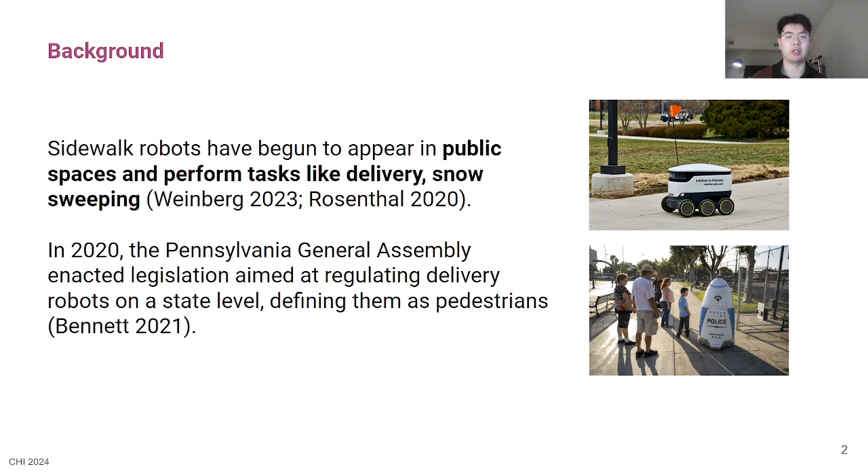Recent years have witnessed the emergence of sidewalk robots, which are essentially mobile robots operating on public sidewalks to perform human tasks, and some states in America have also regulated them as pedestrians. However, prior research has indicated that the presence of such robots potentially poses threats to other sidewalk users, including people with mobility disability. There was also a real-world accident that supports those judgments. We were very motivated to understand the relationship between the two stakeholders, especially to think whether we can design more accessible and responsible public sidewalk robots.

So to this end, human-robot interaction literature provided design factors and methods for us to discuss and test. In this paper, we asked three research questions.

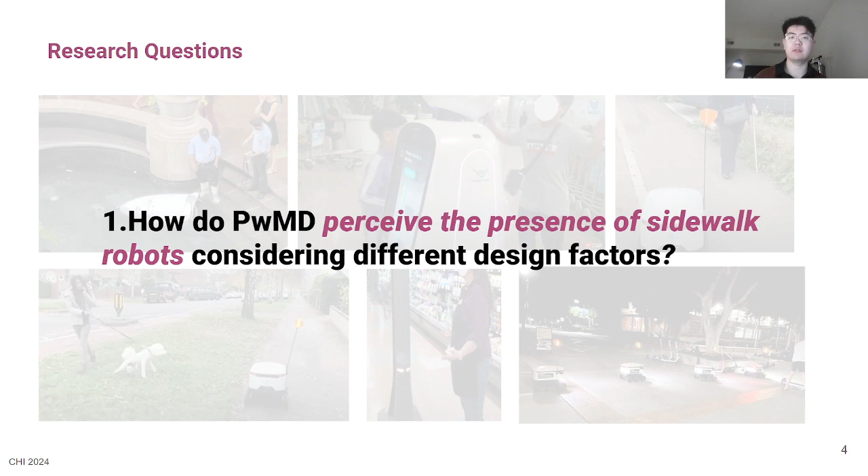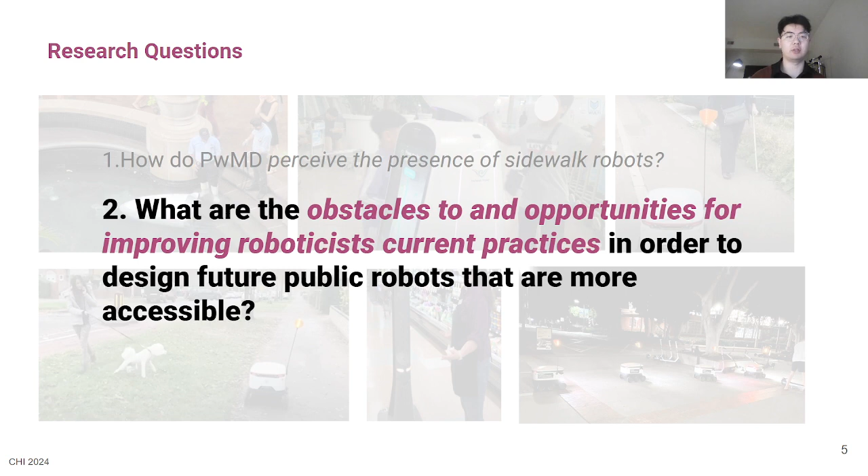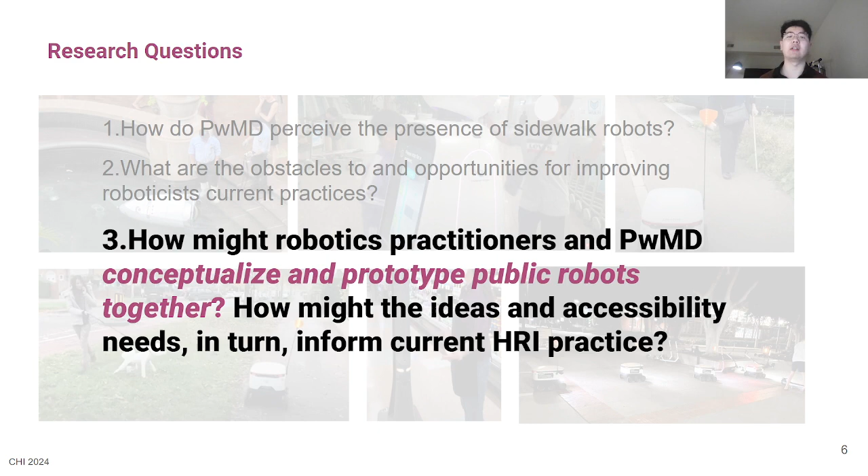Lastly, we wonder, how might robotic practitioners and people with mobility disability collaborate together to conceptualize and prototype public robots? How might the ideas and conversations in turn inform current HRI practices?

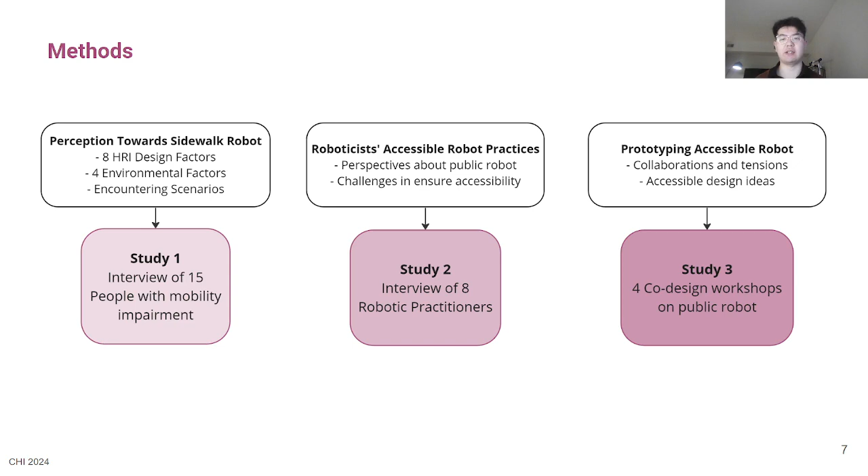To answer these questions, we adopted a three-phase research method. Firstly, we interviewed 15 people with mobility disability and then 8 robotic practitioners to understand their perspectives. Lastly, we paired them in co-design workshops to see how they actually work together to challenge the current definition and design of accessible public robots.

In the first study, we illustrated robots with different design factors from the prior HRI literature by providing explanatory images and videos. This can be a robot in different approaching strategies and in different forms such as height and width. We then asked people with mobility disability how they perceive the design and encounters with the sidewalk robots.

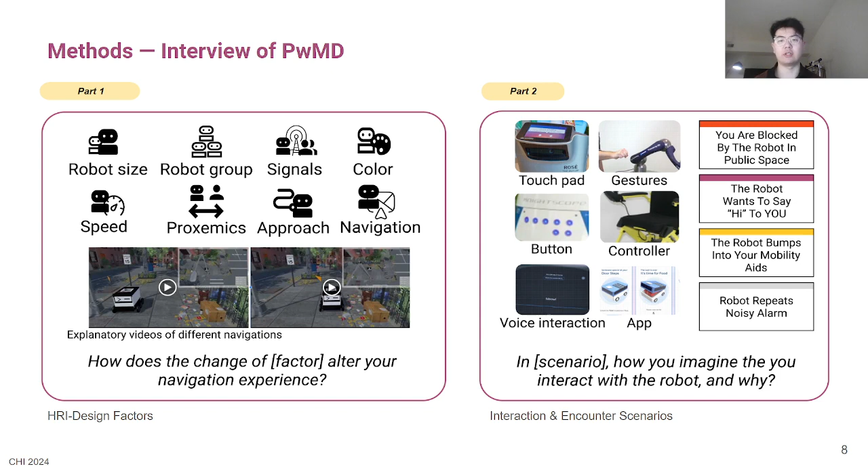And then we provided different encountering scenarios with interaction modalities, asking the participants how they would like to interact with the robots in the given situation and how they would like the robot to interact with them.

The co-design sessions featured early ideation of public robot design ideas. People with mobility disability would initiate the conversation by sharing their needs and imagining a robot to help them. The roboticists then joined the conversation to develop the idea by considering viability and technical implementations. We recommend you refer to our paper for a more detailed setup of all the studies and data analysis.

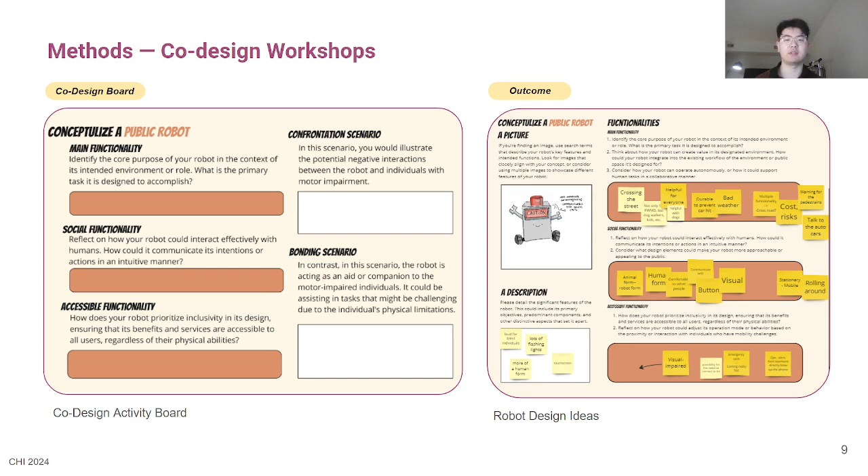Let me first walk you through the perceptions of people with mobility disability on different robot designs. From our findings, we found that there are several design factors and robotic behaviors that lead to potential conflicts and even intensify them. For example, all participants expressed extremely negative opinions towards the idea of robots patrolling in teams, worrying that this could occupy the whole sidewalk, especially the curb cut, for a period of time, and they would be very hesitant to pass the robot team.

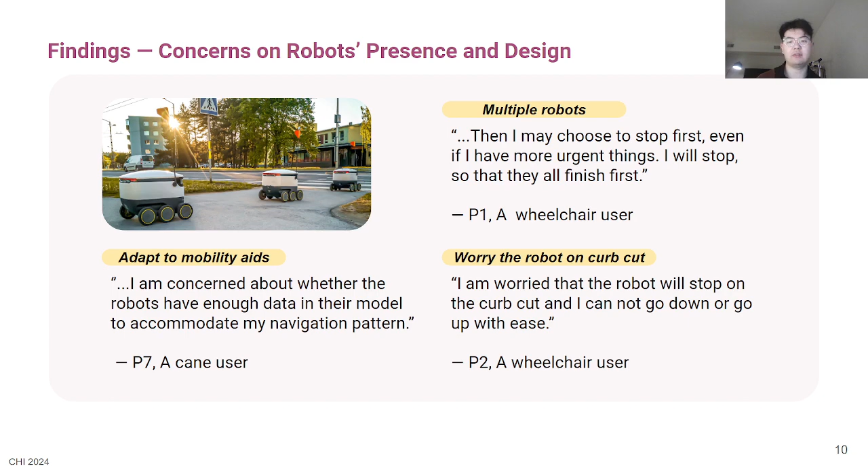Aside from worrying about competing space on the sidewalk, people with mobility disability also worried whether this robot can recognize their mobility devices such as canes and wheelchairs and dodge them when encountering them.

For the purpose of safe interactions, all participants also identified interaction features that contribute to relieving the potential conflicts. For example, one participant advocated that there should be a way, either by voice interaction or physical interaction, to instruct the robot to go off the sidewalk. In this way, they can have the right and have the space to pass.

They also want the robot to be more explicit when they are having behavior changes. One idea they shared is that the robot can announce itself when bypassing the wheelchair users, so the wheelchair users can have more time to prepare and respond.

Now, let's turn to how roboticists integrate accessibility into their current practices. We found that most of our participants, both in academia and industry, view accessibility as a post-issue. That means they focus on the robotic capacities and innovations at first and only address accessibility after accidents arise.

Part of the reason is that for startups and even tech giants, fully considering accessibility seems to be very costly and can delay the launch of their products.

However, all participants also shared that addressing those accessibility issues always requires navigating through both hardware and software compatibilities, and considering the disabled community is also a necessary step for a robot company to be socially responsible and ethical. Thus, the implication is that being aware of accessibility needs might actually make it easier to address them and have a broader social impact.

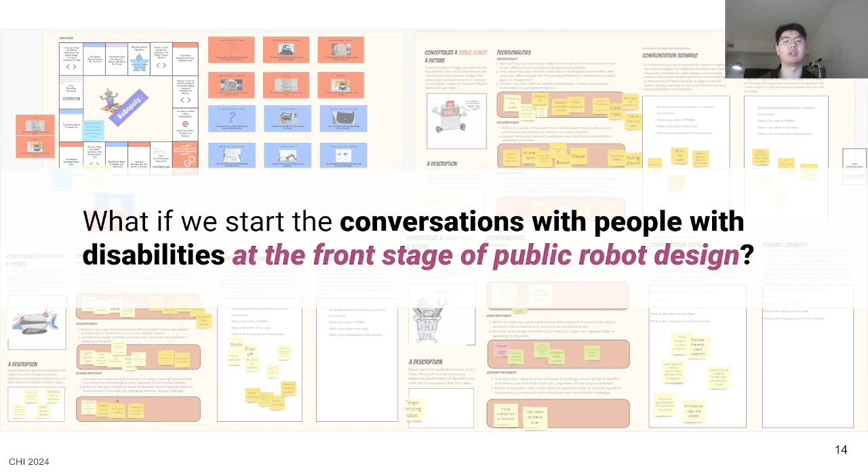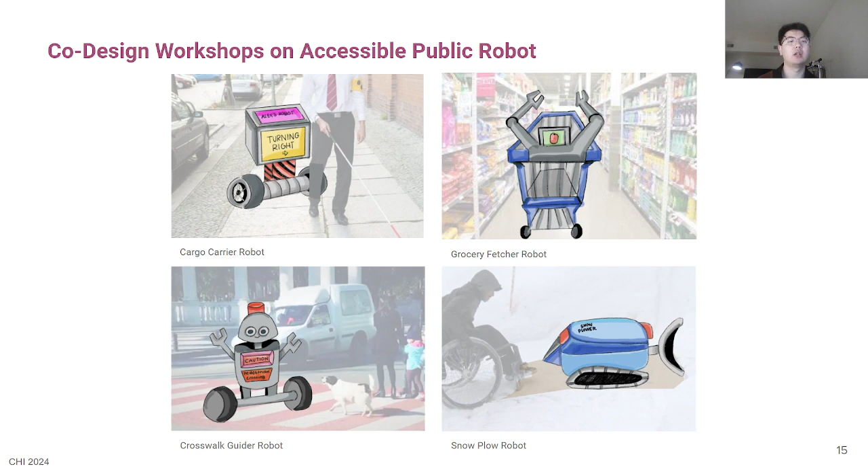This motivated us to hold the co-design workshops. The workshops produced 4 robot prototypes, and I would like to zoom in on one of the ideas to share how more conversations happened as they navigated to the final designs.

In workshop 2, Adrianne, a power chair user with limited hand dexterity, recalled her experience in a grocery store. She sometimes found the human assistant to be unavailable or simply felt awkward asking for help. Thus, she expressed a desire for assistance in fetching groceries that could be done by robots.

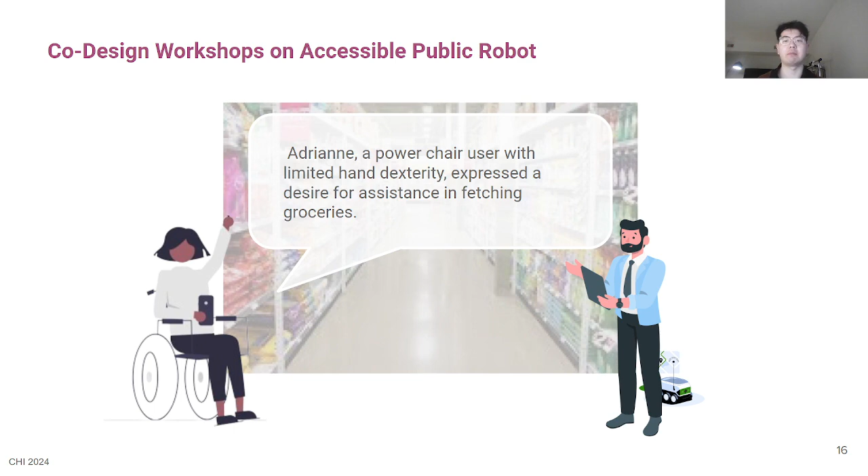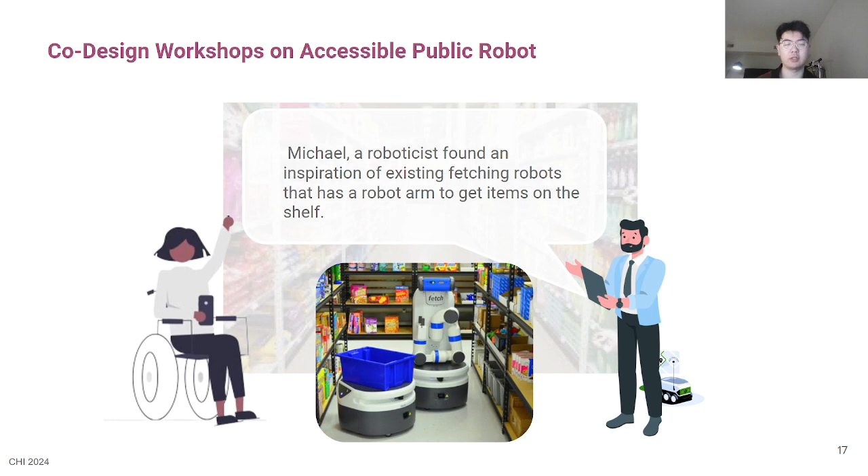Michael, a roboticist, quickly mapped the components the robot should equip and found inspiration from an existing fetching robot that has a robot arm to grab items on the shelf. However, Adrianne commented that the robot's base would take up the entire hallway and make it harder for her to navigate. Thus, she asked whether it would be possible to use only one wheel for the robot to navigate.

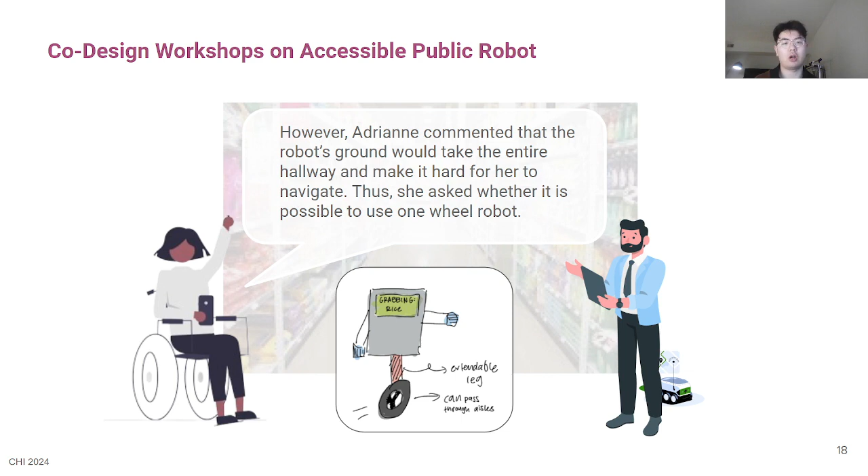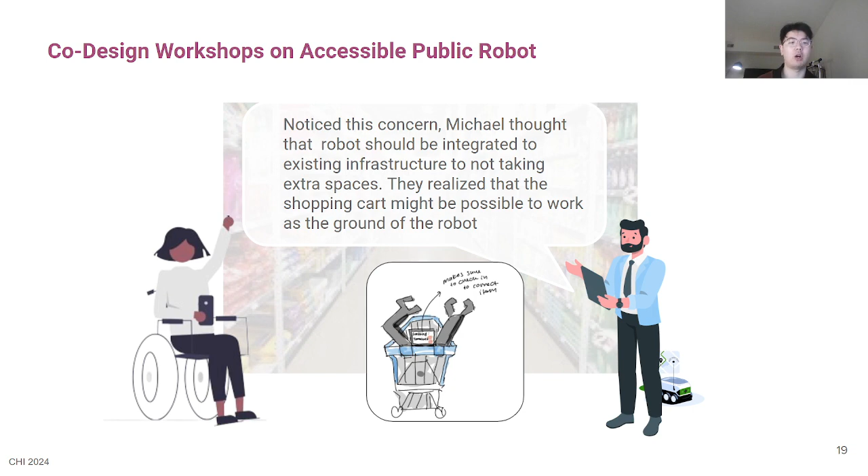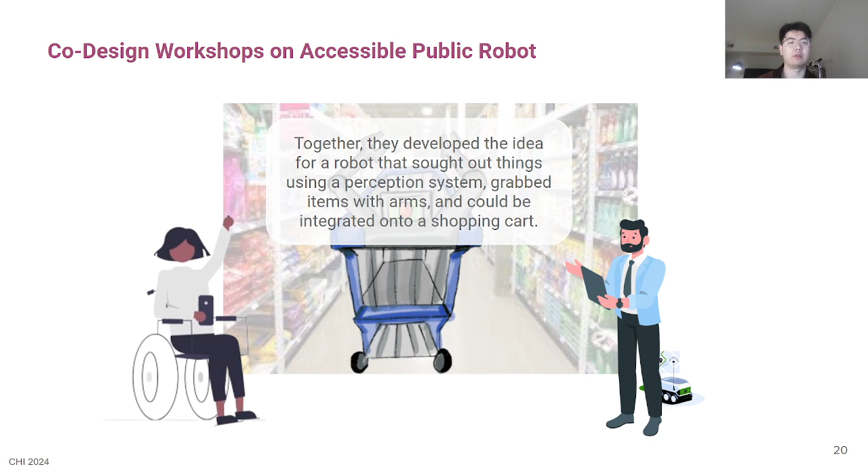However, this idea was recognized by Michael as mechanically challenging. But noting this concern, Michael thought that instead of the robot navigating on its own, it may be able to integrate into some existing infrastructure to avoid taking extra space. They realized that the shopping cart might be able to work as the base of the robot. Together, they developed the idea for a robot that seeks out items using a perception system, grabs items with a robotic arm, and can be integrated into a shopping cart to navigate.

As shown in this case, there were instances when teams needed to work through conflicts around robot features desired by people with mobility disability and the technical feasibility of implementing such features. This disagreement sometimes led to more accessibility needs and concerns being uncovered.

In this grocery robot design, we found that people with mobility disabilities' ideas centered on the need to independently perform tasks that would otherwise require human assistance. This could also contribute to their own autonomy. Consequently, they expect the robot to be able to provide natural interactions, such as understanding their surroundings and requests.

Across all 4 workshops, we also found that all the robot designs featured carrying capacity for people with mobility disability to navigate the physical world. To ensure usability, there were always 2 or more modalities being discussed. This echoes our findings in the interviews that current robots might lack multimodal capacity for people with mobility disability.

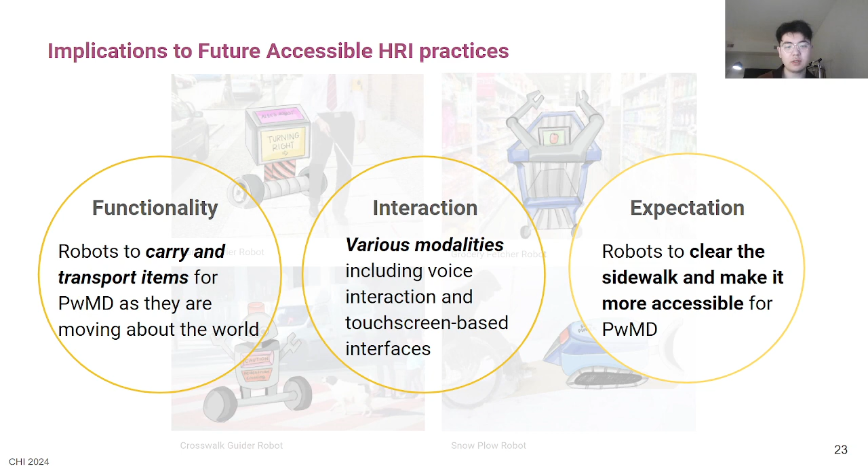These early conversations addressed some low-hanging accessibility issues, such as interaction usability and managing space sharing. The co-design workshops can also reveal even more opportunities for supporting public robots and designing for the benefit of disabled communities.

After their collaborations, both groups shared very positive comments on the idea of having co-design workshops. For roboticists, the inclusion of people with disability made it easier to change, modify, or include new ideas that would improve accessibility, which is also beneficial to improving their products. For people with disability, the process of narrowing down from their imaginations to viable products also helped them reveal the core value of the robots.

We envision our work as a detailed exploration of accessible robots. Looking ahead, we anticipate that the HRI and HCI community will develop more accessible and responsible robot interactions, especially as robots continue to integrate into public spaces.

The insights and design opportunities outlined in our paper can serve as a solid foundation for further experiment and development. So, leveraging the success of our co-design workshops, future endeavors could also emphasize community-driven participatory approaches, engaging a broad range of stakeholders in the creation of public robotic technology.

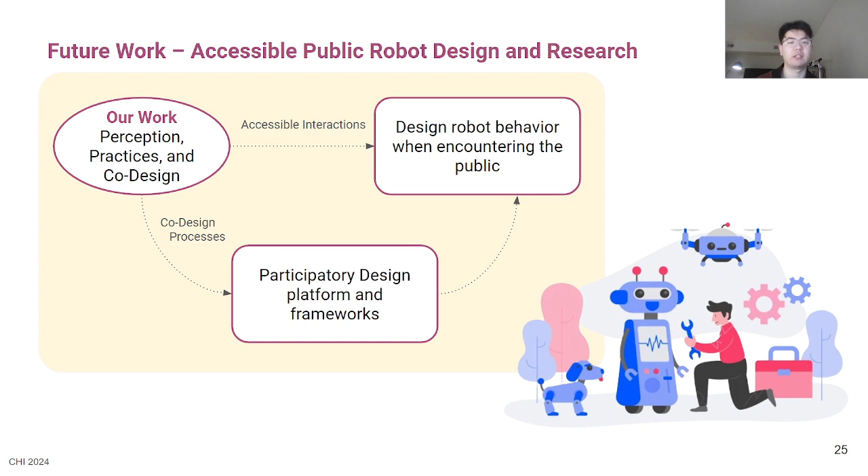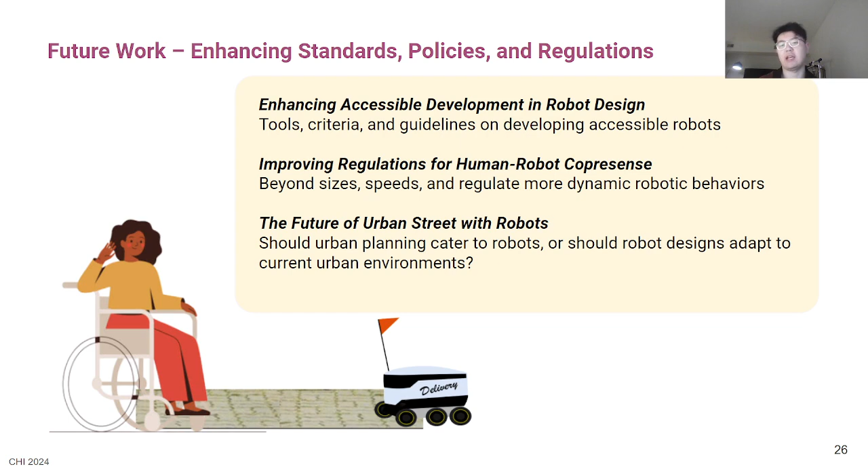To conclude, our research employs qualitative and design methods to explore how people with mobility disability perceive robots of varying designs, how roboticists incorporate accessibility into their workflow, and how these two groups might collaborate for future civic robots. All findings shed light on the challenges of inaccessible designs and offer strategies for improvement.

Through both interviews and co-design workshops, we recognize that inclusion is essential for developing robots that truly cater to the needs of people with mobility disability. Additionally, we point to several promising directions for making both robots and robotic practices more accessible. Thanks for listening to our talk.